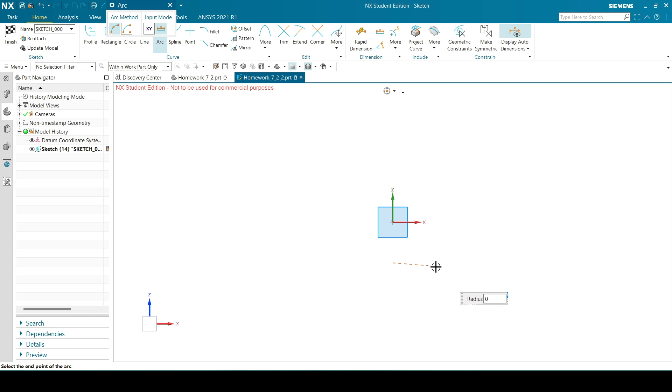I'm going to start at the bottom here where there are 3 arcs basically - this one here, then also these 2 tiny ones there. So I'm going to use arc and put it in, and before moving on I'm already going to put in its dimension. So it's 200, just so that the whole sketch is scaled okay.

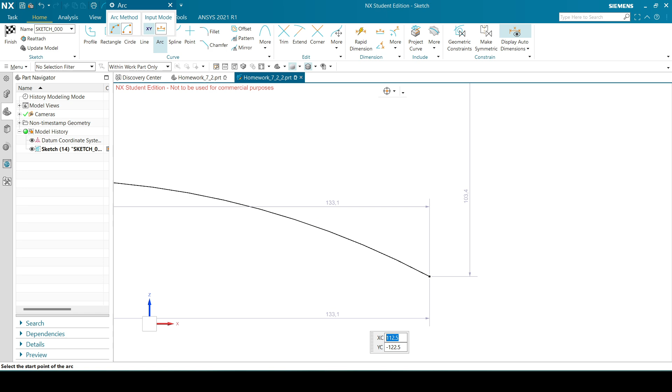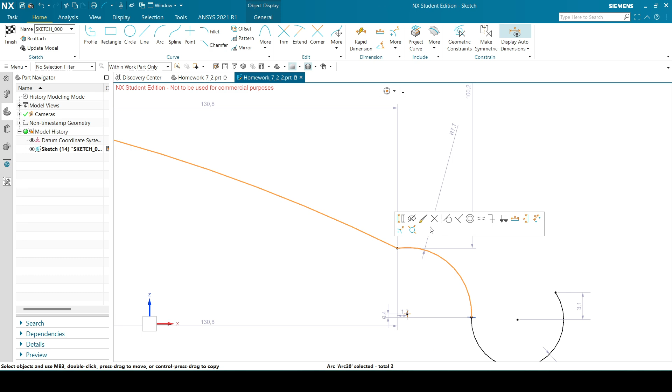Then the other 2 arcs - this tiny one here goes upwards like that, so I'm going to put in this one, then make them tangent later, and then also the other arc like that. These 2 are already tangent, so only these 2 need to be made tangent. Something like that. Then I'm just going to put in a constraint.

For this point here, I'm going to align it with the sketch origin.

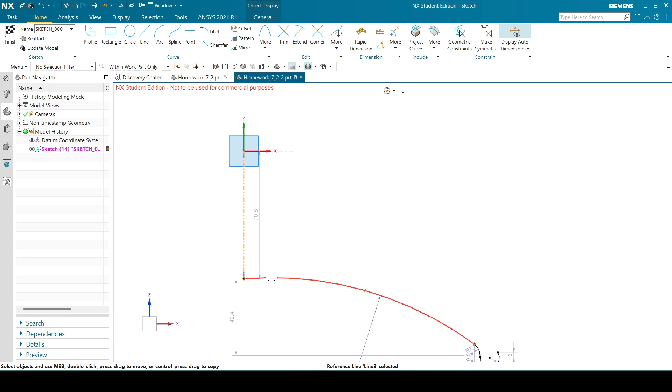I'm just going to do something else also. You can see that basically the bottom arc of the cup, it's 1 arc, so obviously its topmost point is perpendicular to the center point. So I'm going to put that in - a reference line from the origin until that point, making it a reference line, and saying these 2 should be perpendicular. Okay, like that. Now I'm going to continue with dimensions.

So these 2 little arcs here - the tiny one is 1.5 millimeters. So 1.5.

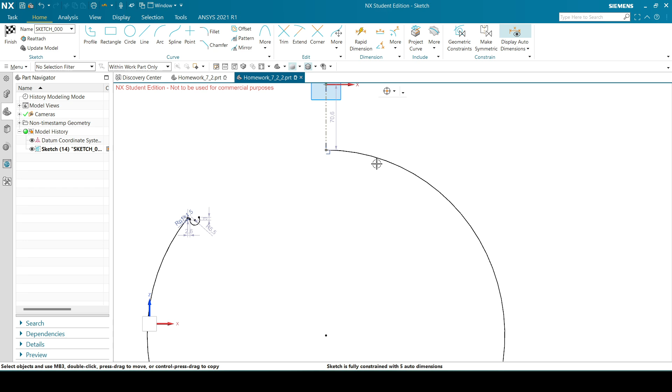Okay, so it made it very weird, so I'm just going to Control Z and maybe just start with the other one.

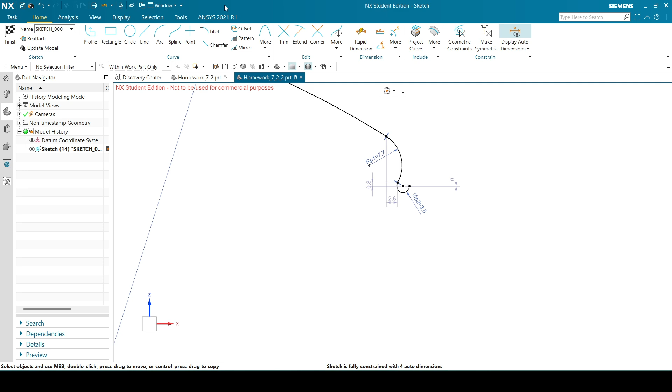So the other one is 3 millimeters. And I think it just put in its diameter, not its radius. So I'm just going to change here to radial, and yes, radial 3. Okay, didn't change it - radial 3, now it changed it.

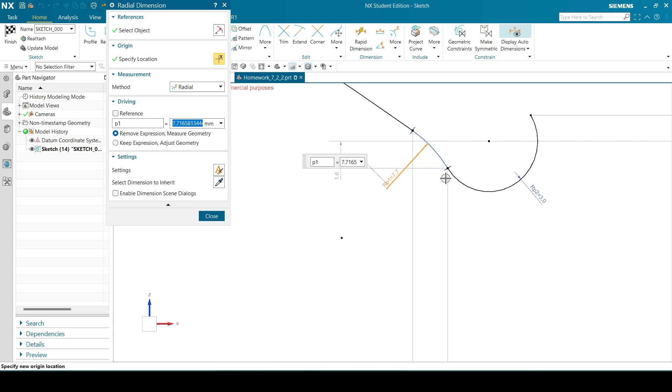I'm just moving this one a little bit so it looks better, and then I'll change this one to 1.5. Once again it decided to be very weird and move it all the way to there. So for now I'm just going to skip that one, delete that dimension, and a little later when we put in more constraints I'll add that dimension.

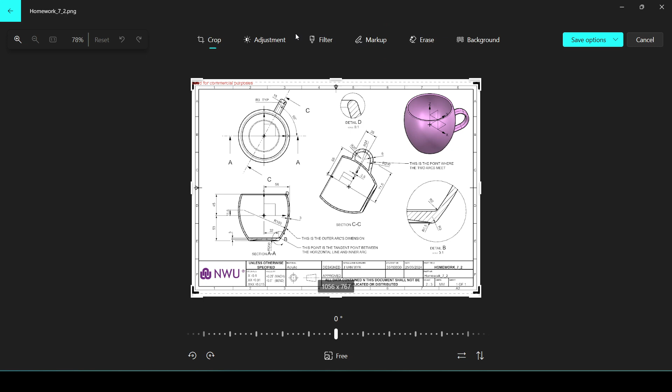Let me just go and mark the ones I already put in, maybe with the highlighter. Okay, I did put in the 3 and this 200 there.

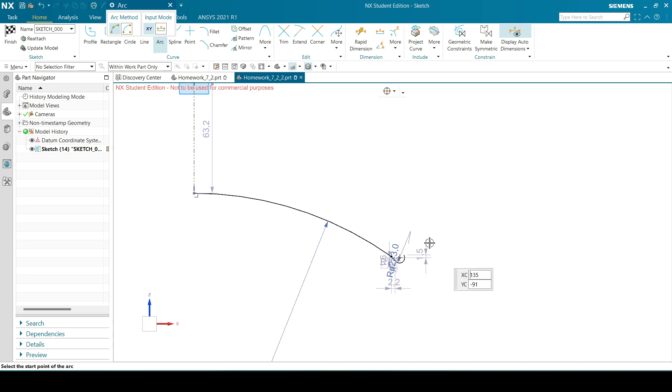Now I'm going to put in this outside arc, the 100 millimeter one. I'm going to use the arc, start at this point here, take it to somewhere at the top there, and just put it in like that.

These two arcs should also be tangent, so I'm going to put that in. Then its dimension - 100, like I said. 100.

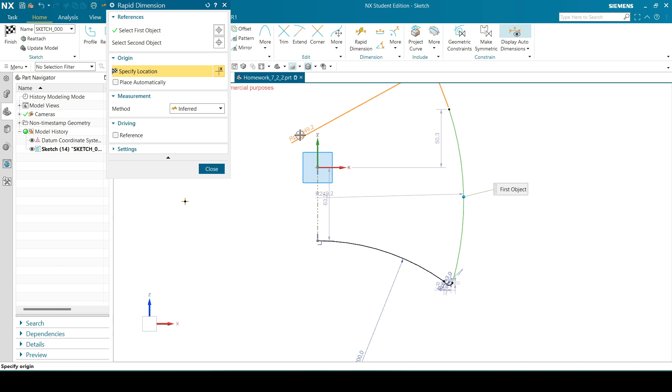Okay, I'm just going to move this point a little upper and something to that effect.

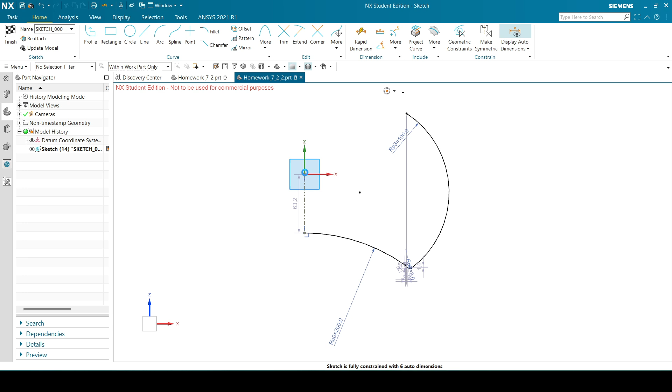Now I'm just going to mark that I put in this 100. Then I'll put in this dimension here, the 11.5, which is the distance from the center point to the arc's midpoint. It should be on top of the axis here, so I'm moving it a bit, saying it should be 11.5.

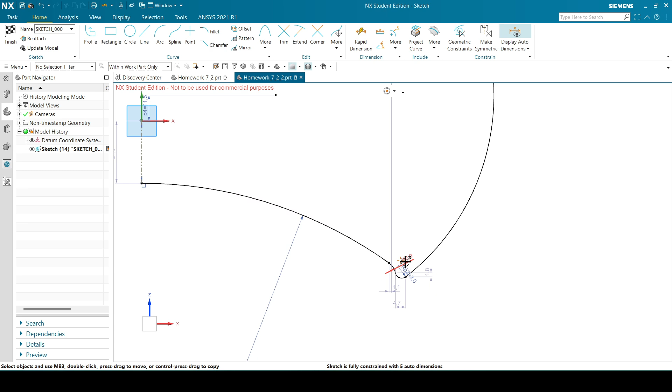Okay, it accidentally messed up the bottom here, so I'm going to pull it until it looks a little better, something like this. This looks better, and I actually want this point also to be on that side, but it's also not liking that at the moment, so yeah, we can do that later.

I want to get it a little bit better in position, because at the moment it is very archy. Yeah, so something like this is already a little better.

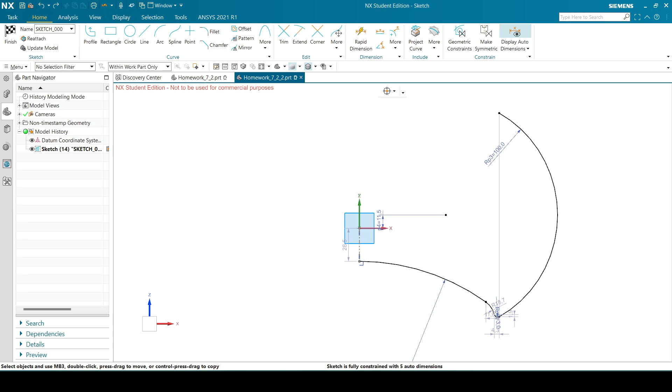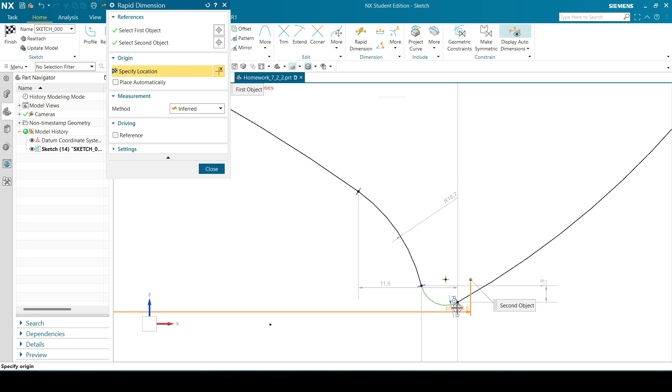It's still not exactly how it should be, but we'll fix that all later. Okay, so another dimension we can already put in is this 53, since we already have the bottom, so it's from the sketch origin to the tangent point there. So from this point here, so this tangent point - it accidentally selected the wrong thing. Okay, it doesn't really want to select exactly. Okay, that's good, 53, there you go. Okay, this already fixed it a lot. It actually moved this point to the left of the axis, so that's good. Okay.

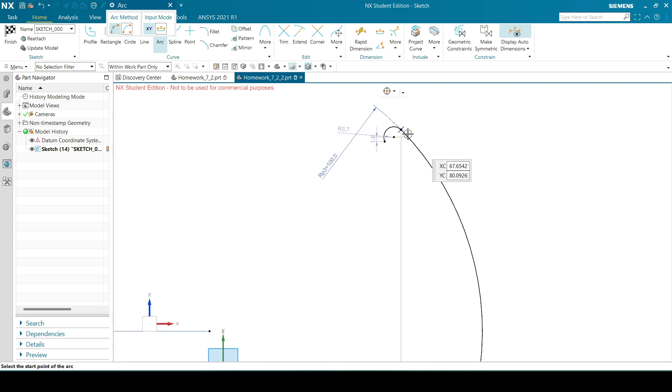Then here at the top of the arc that we have here, there's this little half circle, so I'm going to put that in, just using arc again, and there you go, and it should be tangent, those 2 points.

Then the inner surface of the cup or wall is also an arc, so once again starting at this point and to somewhere around there. Okay, then okay, so these two also, they are tangent.

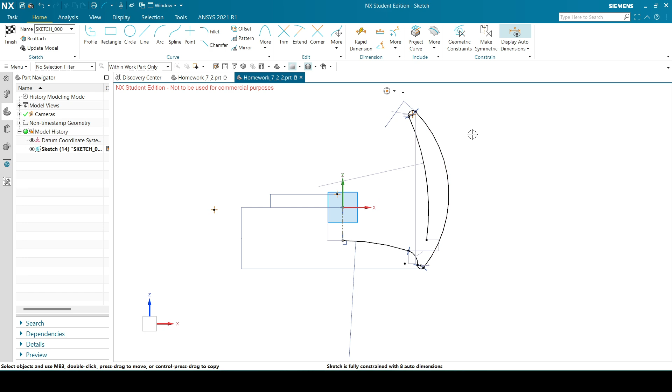Then the center point of this arc and this point should be coincident, since well, we can see that there's a consistent wall thickness between them. So I'm just going to find their center points and make them coincident. There you go. Okay.

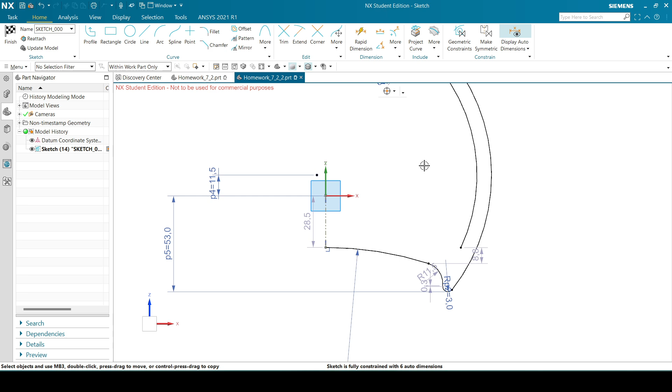Then at the edge or at the bottom of this arc, there's this little fillet. So you can either put it in afterwards or just already put in the arc. I'm just going to already put in the little arc, and they should also be tangent.

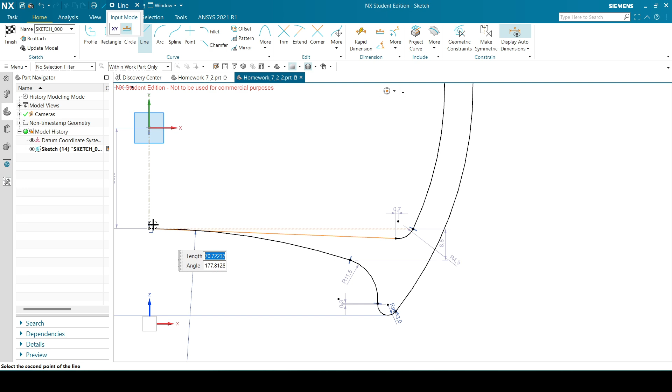Then after the fillet, there is a straight line that goes to the center. So I'm just going to put in this line. I'm just going to put him in a little angled. I'll make it horizontal now. First going to constrain these 2 points here, and then make this one like that, and just move it a little up. Okay.

So I just have to update the dimensions I already put in. So I already put in this 53. Then okay, I also put in the 11.5. And then okay, so that little fillet is 2 millimeters. So let me put that in.

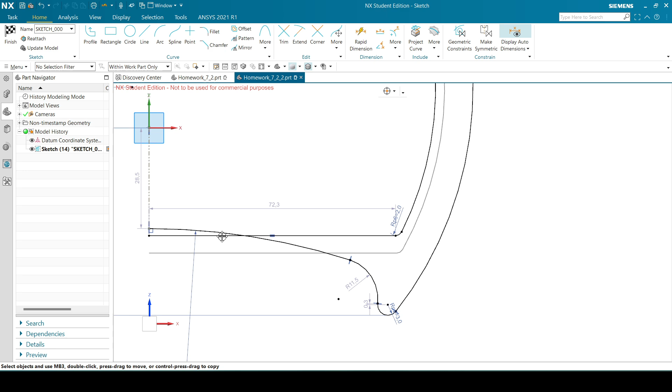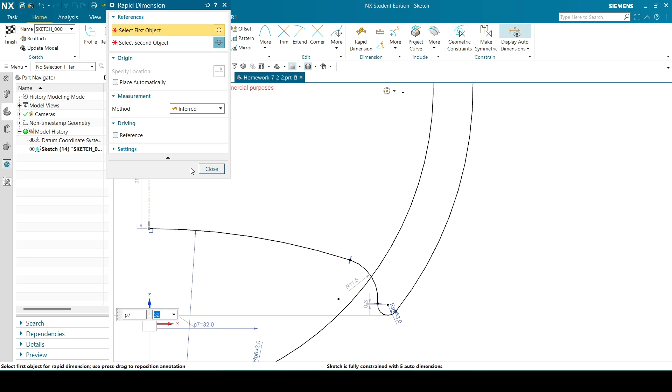And just move this line once again a little upwards. And then so here the distance from the tangent point between the horizontal line and the inner arc to the sketch origin is 32, that dimension. So I'm going to put that in. Okay, I didn't like that so much, it moved it out of the way, so I'm just going to move it up again. And now the thing looks very weird because this wall thickness is way too much, but let me fix that.

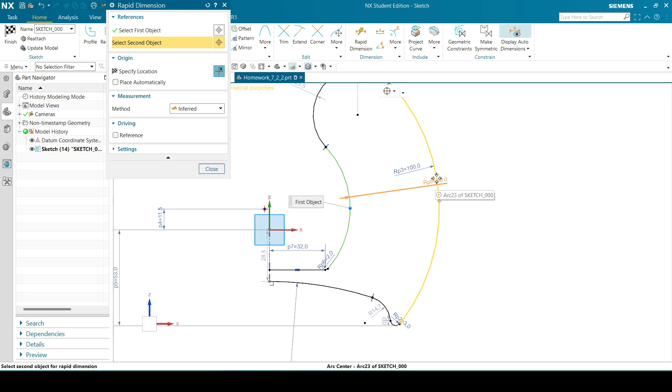So the wall thickness should be 3 millimeters. So let me put that in. Between this point and this point, and it should be 3. Okay, that's better-ish. And then I'm just going to move this part up, and then I should fix these little arcs. Just Control Z. Okay.

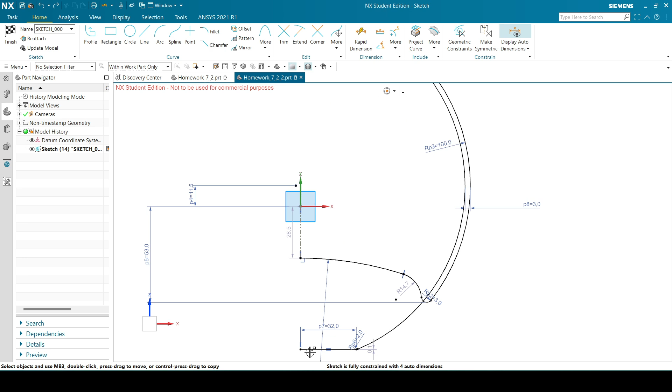So there's something, for some reason, yeah, this is very weird. It wants to make have this line go through that point, it seems. So let me see if there's a constraint there. It doesn't seem that way. It's maybe just a little weird.

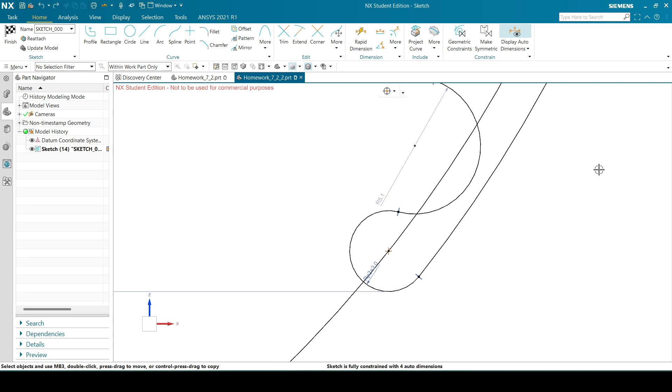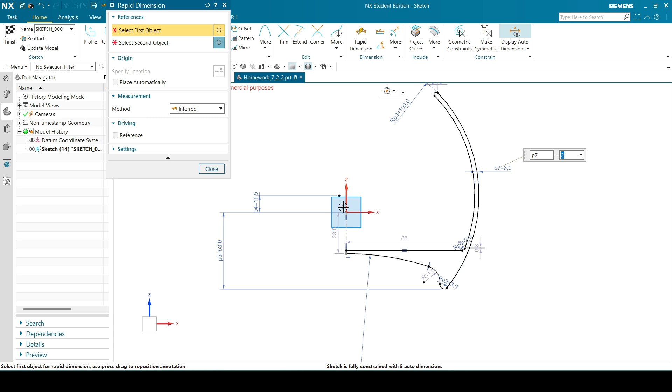So I'm just going to go back a few steps until things look a little better. So okay, at this dimension it kind of freaked out. So let's just skip it for now. And first maybe do the wall thickness. Okay, that's better. Okay, so let's just move on.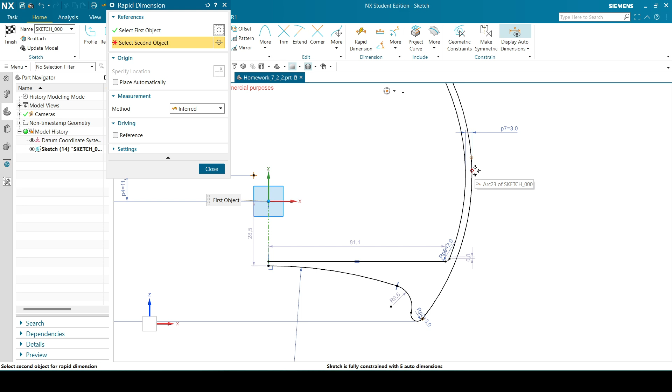Then I'm just going to - didn't put in the 32 yet, but I did put in the 3. Okay, so now I'm going to put in this 56, which is the distance from this point to this tangent point here. 56.

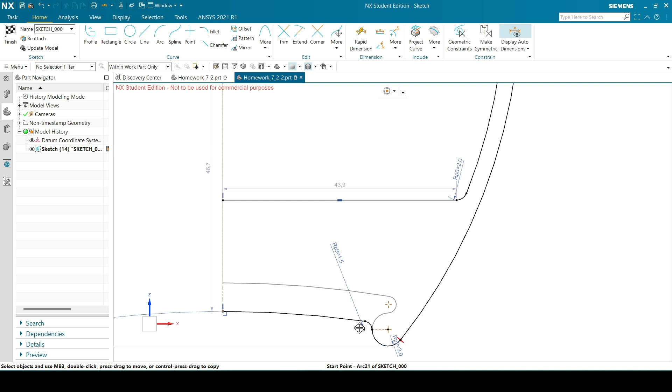Now I'm going to try and put in this one's dimension that didn't want to work with us last time. So it looks a little better now. It actually put in the 1.5. It's just looking kind of strange, but I can fix that. Something like that looks better. And then just move this one into the right place.

So just update, put in this one, and I think the 32 will work now. So these points and 32. This also already looks a lot better than the last attempt, although at the moment this line doesn't want to move, so there's something that broke a little bit.

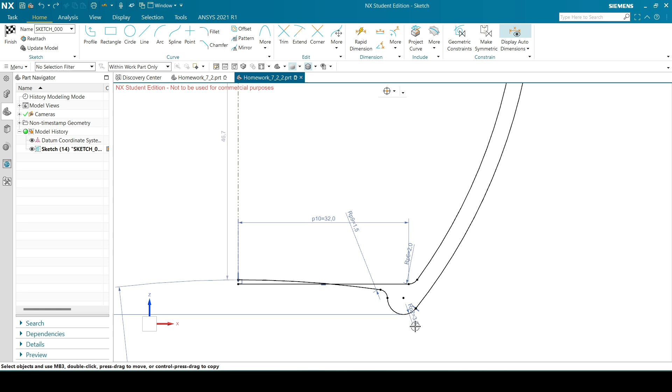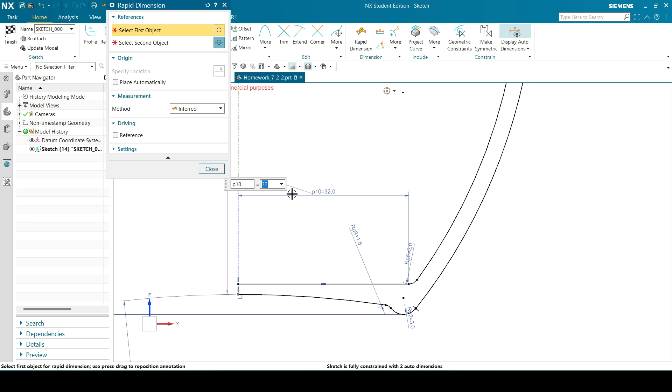Let me just go back a few steps and maybe just get it into position a little bit. I'll just put in the 32 later, just move this one down and then this one down, and then it, I believe, will work. 32. Okay, now it looks better. They are not overlapping, so that's good.

Then while we're there, I'll put in this 3 millimeter, which is basically the distance between this edge and this bottom point here. So, 3 millimeters. There we go.

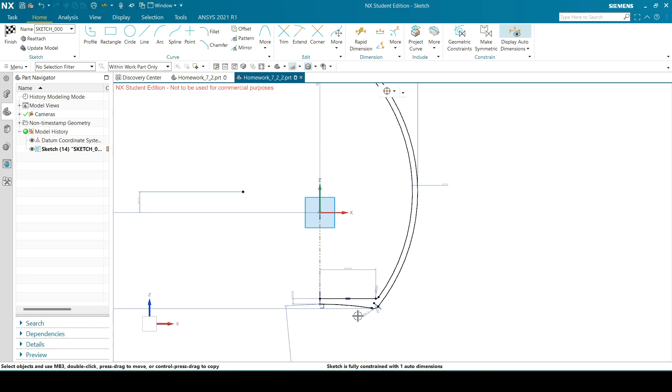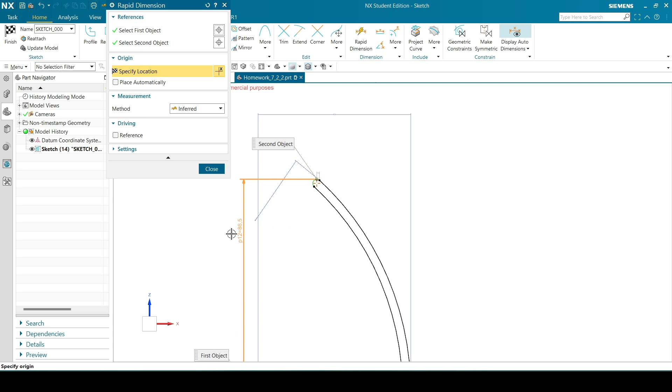And I also think that I put in that 56. Yes, so we can just highlight it. Then we still need that 45, so that will be from the sketch origin and this tangent point at the top. Okay, it selected the circle, not the tangent point. There you go. And this dimension should be 45. 45. There you go. So now the sketch is done and it says it's fully constrained.

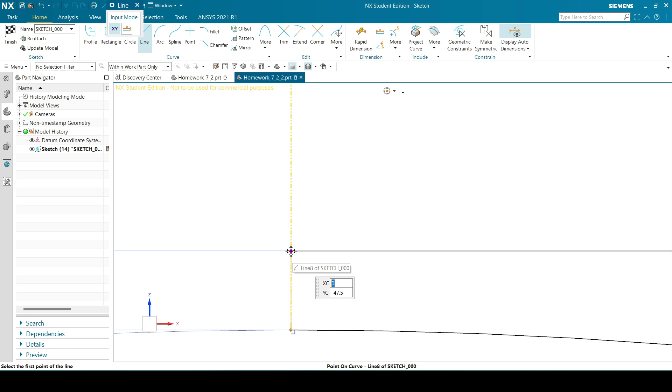There's just one thing that I'll do also before finishing the sketch. I'm just going to connect these two lines here so that it's a full profile. There you go, and the sketch is still fully constrained. So now I can say finish.

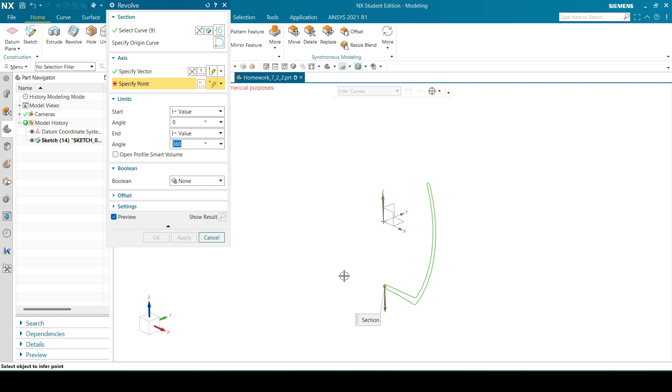Now it's a very easy part, just revolving this sketch that we drew, so it already selected automatically the sketch that I have. Then for the vector, I'm going to use the z-axis, and for the point, I'm going to select that point there. And then I'm just going to say okay.

Okay, so now a big part of the cup is done. I'm first just going to hide the sketch, and then what is still required is the handle.

And the handle is at the angle of 60 degrees, so I should put in a datum plane for that. So at an angle, the planar object, I'm going to select this one there, and the linear object, I'm going to select the z-axis.

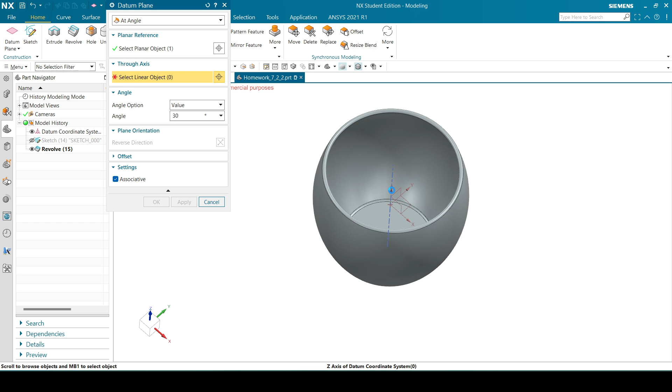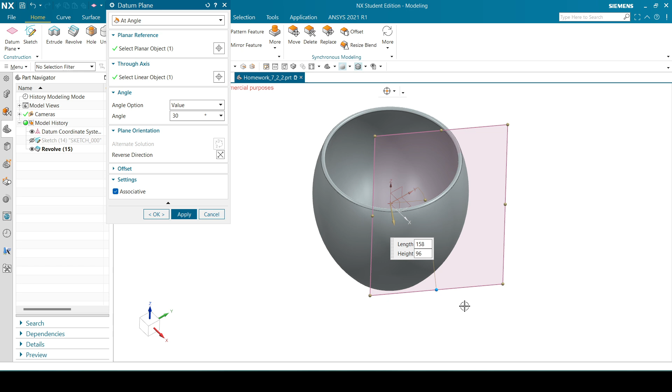And then, okay, so we want it to be 60 degrees from the x-axis. So 60 degrees also equates to 30 degrees if you measure it from the y-axis. So yeah, that is then what I'm going to put in. But before I say okay, I'm just going to make it a little bit bigger so that the datum plane is actually not hiding in the middle of the cup.

Okay, and then I'm going to sketch the handle on this datum plane, and it turned my sketch around, but that's okay. I'll just then sketch it upside down. I'm just highlighting this we already put in.

Okay, so for the handle, I'm just going to draw the outline or the outer edge, since its dimension is given. And then when I get to extruding it, I will just use an offset. So I'm not going to draw the entire handle.

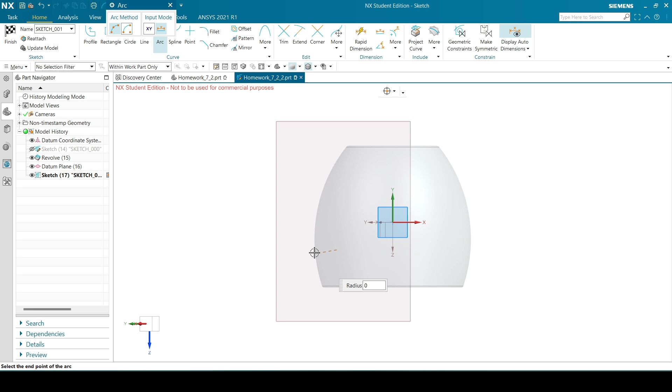Okay, so I'm going to start with arcs. It basically consists of 3 arcs. So I'm going to just put them in roughly. So 1, and then 2, and 3. Okay, then I'm going to make all of them tangent.

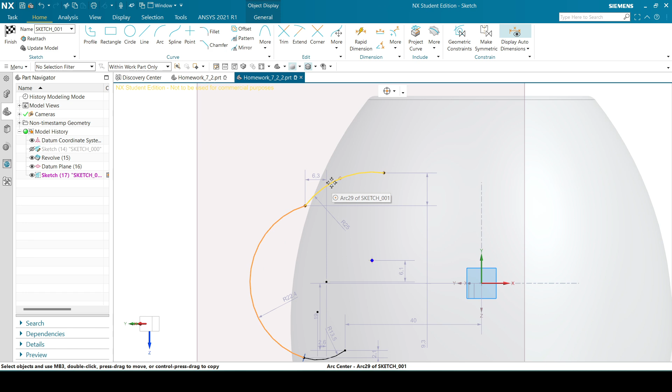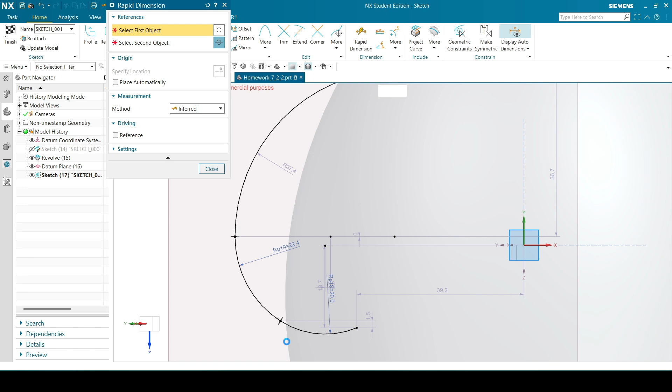Just move this one a little bit to a better position, all of them. Then I'll put in their dimensions. So this one is 20 millimeters, its radius. 20. The second one is 24. And the last one is 200.

And now it put it completely in the wrong position, so I'm just going to pull it back. There you go. Okay, so then the dimension or the distance from the R20 arc to the midpoint is 65.

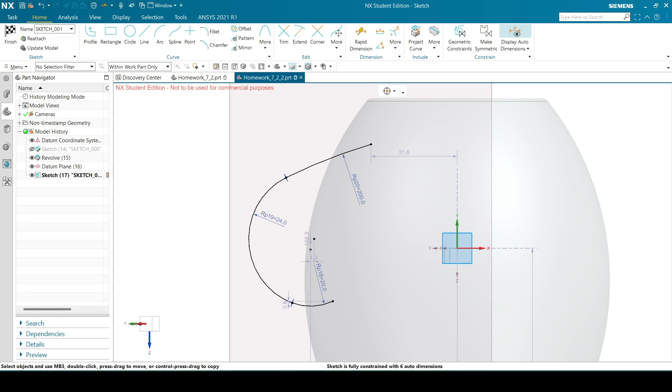So I'm going to put that in. The R20 arc, this is its midpoint, so 65. Then...

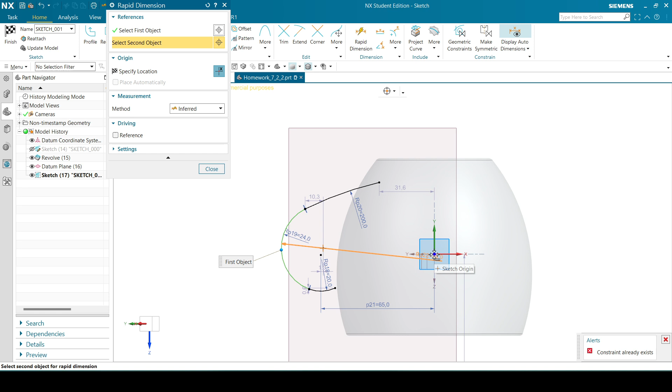Distance from the R24's midpoint to the sketch origin is 2.5 millimeters, and that is the top part of the cup. So the R24 to this one, sketch origin, and it should be 2.5.

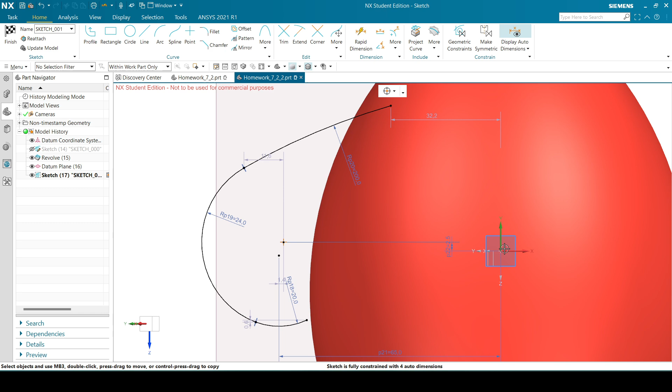Okay, and I think it put it in incorrectly now because it's below or at the whole bottom part and not on, so it's basically below this YX plane where it should be on top. So I'm just going to delete it and move it a little upward and then put it in. Okay, there you go, 2.5.

So yeah, it says this is the point where the two arcs meet, so the distance from that point to the origin is 71.5.

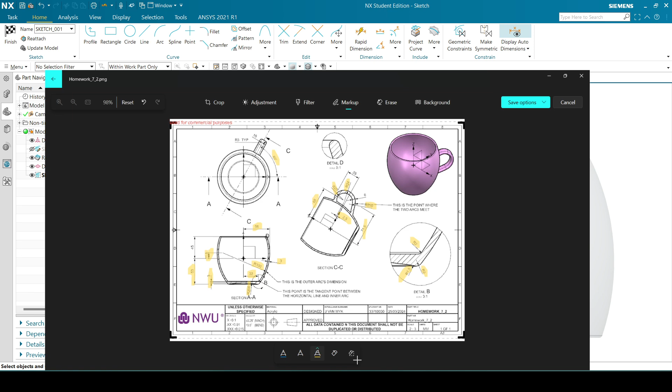Okay, then 26 millimeters, that is from the origin to the tangent point there at the top. So tangent point, origin, 26.

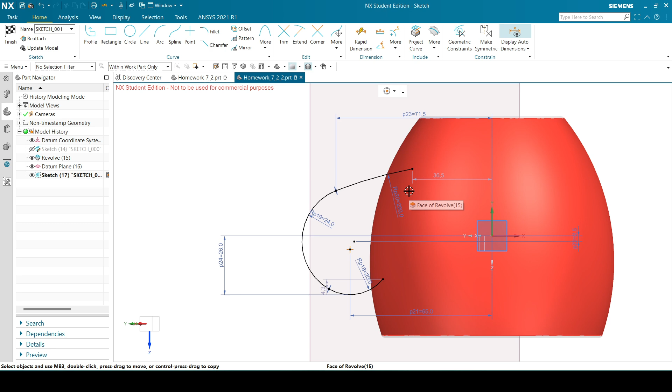Okay, so the other dimension we are still missing is the 6 millimeters, but I'm not going to put that in, I'll use that with the extrude. So then we still need two constraints, but if you pull these ends here, you can see that those are basically the two parts that still move.

So for them, I'm just going to put in an arbitrary amount just so that it intersects with the cup, and then we'll get rid of the excess parts later. So I'm just going to make it 38, and this one we can make maybe 49. It doesn't matter how much, just so that it extends past the cup.

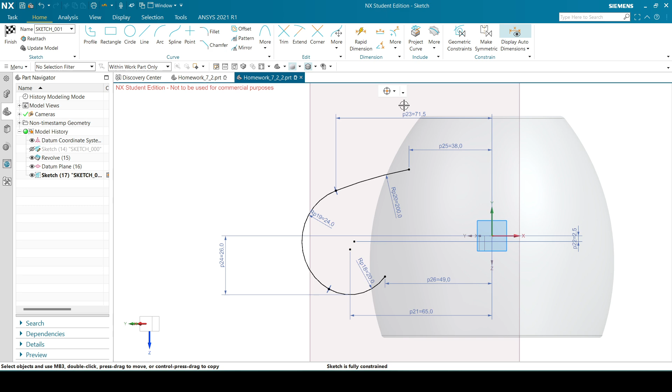Okay, then the sketch is fully constrained, so I can finish it. So then I'm going to use an extrude, and I know it looks kind of weird since it's only one single line, but that's okay.

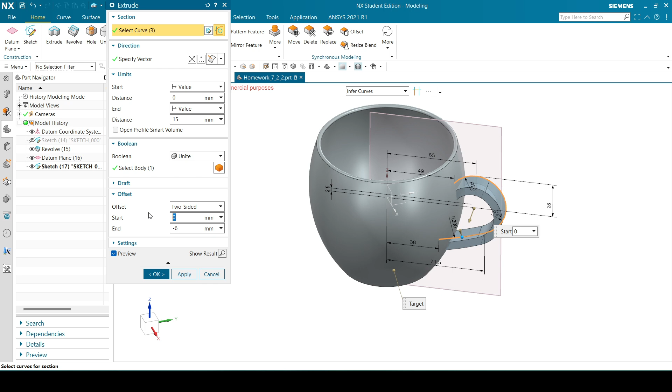I'm going to use the offset for it, and select the two-sided since, well, I technically only wanted to extrude to one side, that's inwards, but I can just make the one 0 and then the other one should be 6 millimeters, but if I put in a positive 6, it wants to make it outward, so I'm just going to put in a negative 6.

Then also from this top you can see that it is kind of symmetric around this plane we put in, so thus I want to make it a symmetric value of 15. And yeah, that's it for the handle.

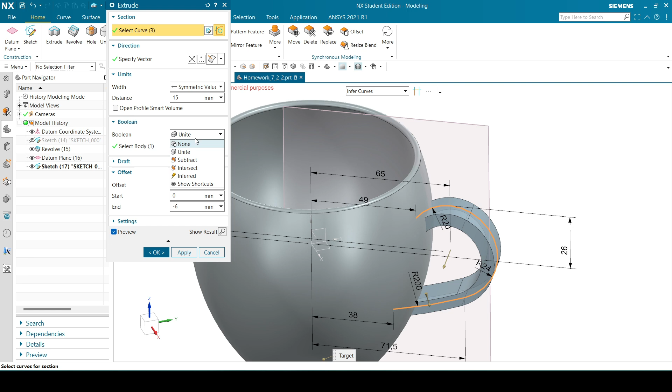Only one thing, so I'm not going to unite it at the moment because since there are these little parts that extrude out into the inside of the cup, I will have to trim it, but if the whole body is united, I won't be able to trim it using the inner surface of the cup, so that's why I'll just unite them later.

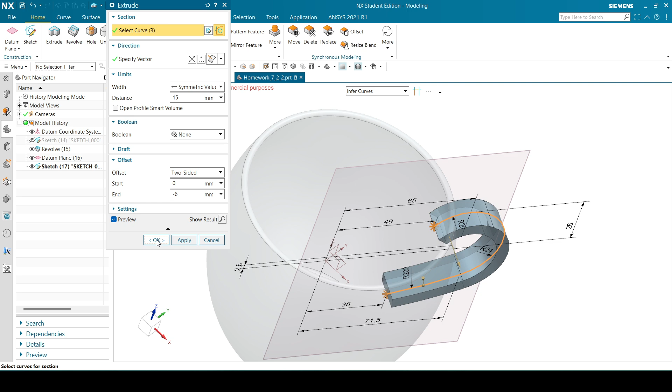So then I can just say okay, so you see the little parts extending here, so I want to trim them, and for the body I obviously want to select the handle because I want to trim some of it. And then for the tool I'm going to select face or plane.

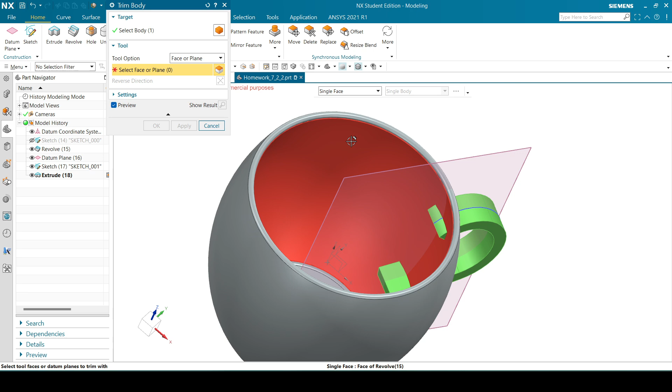When I select face or plane, I'm going to make it single face and select the inner face or inner surface of the cup, and then you can see it removes that part and only leaves the outside of the handle.

Okay, and then I'm just going to unite the handle and the cup. Okay, and then before continuing, I'm going to hide the sketch and hide the datum plane since I don't really need them anymore.

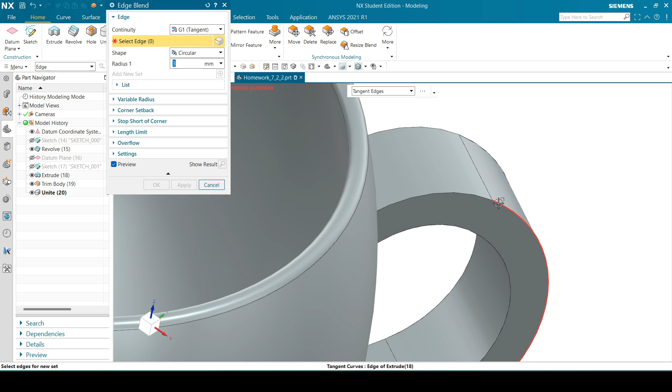And then the last thing that is required is this 3 millimeters, which is the edge blends. So I'm going to put in an edge blend, and I'm going to select all of these edges of the handle, and it should be 3 millimeters. Yes, 3. And then I'm just going to say okay.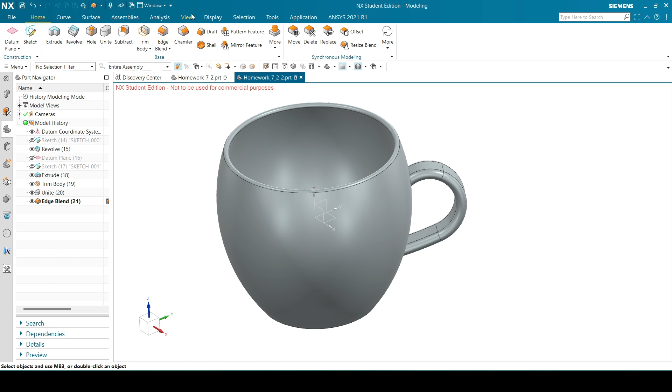And that is about almost it for the cup. So it's basically done. The only thing we can still do is give this cup a color, so you can just go to display, edit object display, select the object, and then at color you select it and just choose the color that you want and say okay.

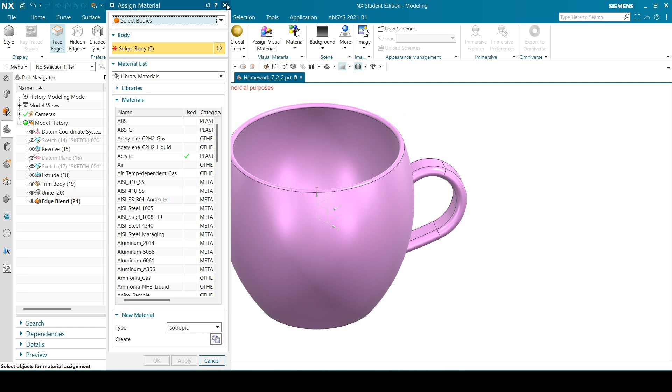And that's it. Then lastly, the material. So just like always, I'm going to go to tools, materials, assign materials, and it should be acrylic, so I choose acrylic and apply, and then that is it. So the cup is finished.

Yeah, so I hope that this video helped in explaining how to make the cup, and I hope that you also find it successful. Thank you.